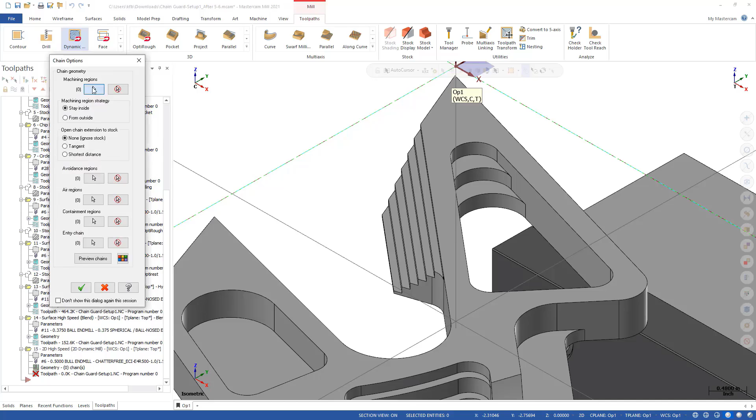I'll hit no, and go back in and do it again. But I'm going to make sure that I have loop selected now. That's a common thing that happens because Mastercam will remember the last selection method you chose.

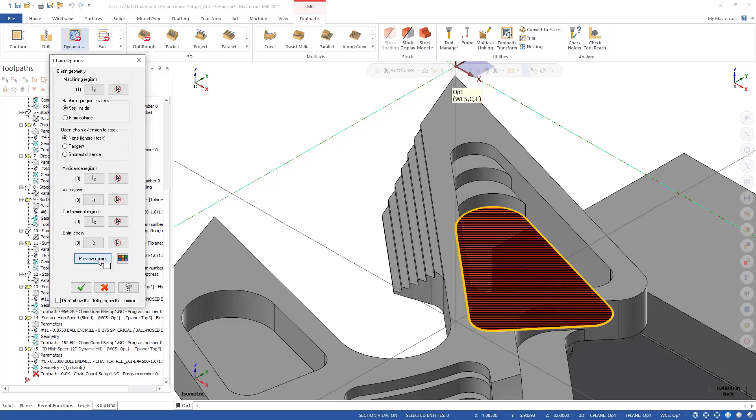So now that loop is selected, we're going to start here, and this will be the area that I'm going to machine. I'm going to stay inside, and just as a check, I hit preview chains, and of course that's exactly what I want.

For the tool, we're going to choose a 1/2-inch bullnose. We saw that earlier, it's got a little radius at the bottom. This will be dynamic mill.

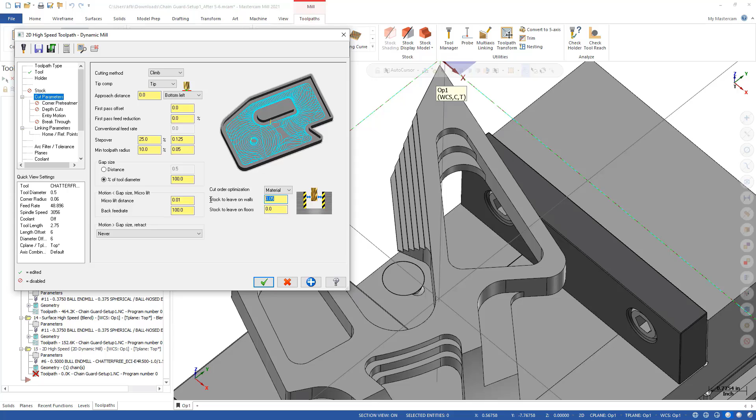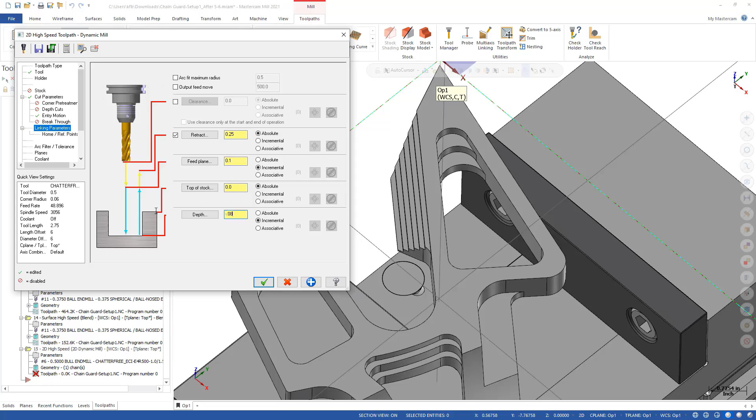I'm going to make sure I leave 0 on the walls. For my entry motion, we'll do a helix this time. For the linking parameters, we're going to go a little bit below this, because we have a radius at the corner of that tool. So let's go down minus 80 thousandths for now, and we can always adjust that if needed. Let's click OK.

And here's where our toolpath looks. So we ramp in, we walk around the outside, and let's just make sure. It does look like we're clearing it, so that's good. You can imagine if you didn't go as deep, you'd have a little bit of a cusp there that you'd have to work out.

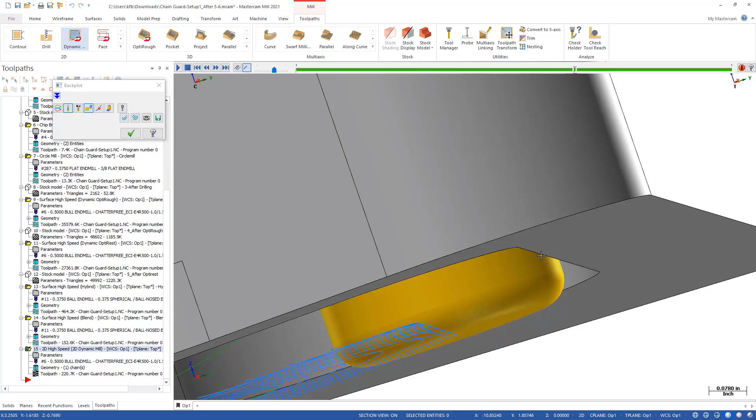Let's finish it off, and we can see how it finishes this corner. So now let's work on these two ledges. For this, I'm going to choose a contour toolpath.

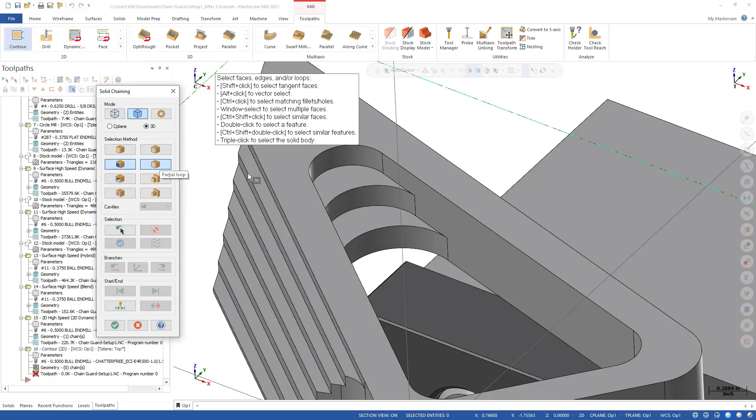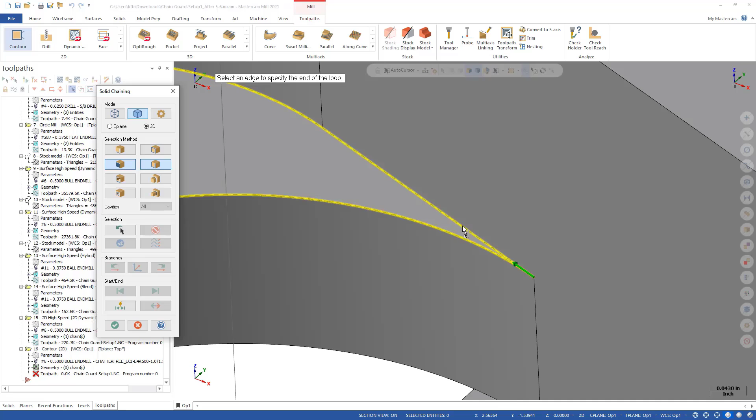Here's where partial loop is going to be useful, but selection is very important. So here I'm going to make sure that this face is selected, but closer to this edge. So it starts there. And again, it gets confusing because you're not sure if you're going up this edge or along this curve. But I'm confident I'm going up this edge because I selected closer to that edge. And it says select an edge to specify the end of the loop, and that'll be right here.

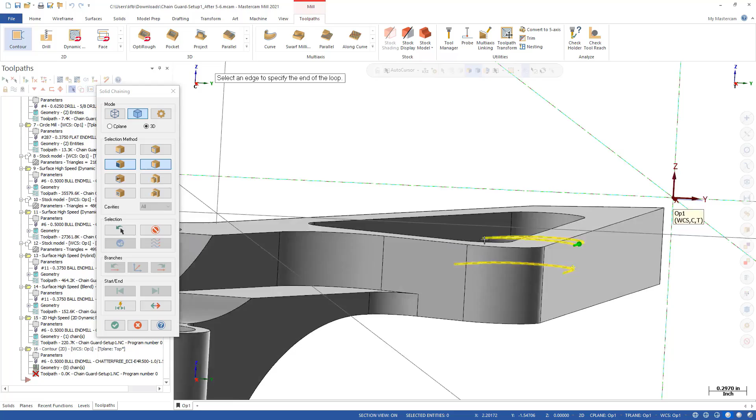So that's what I'm expecting. We'll do the same thing up top. We'll start right there, and we'll end right here.

And we're going to choose the same tool, and this will be called contour pocket. I'm not going to worry about depth cuts here. However, under the lead in, lead out, let's make sure that these are small enough, so we might have to adjust these if needed, because remember, we're starting out here and then leading in and around and then leading out.

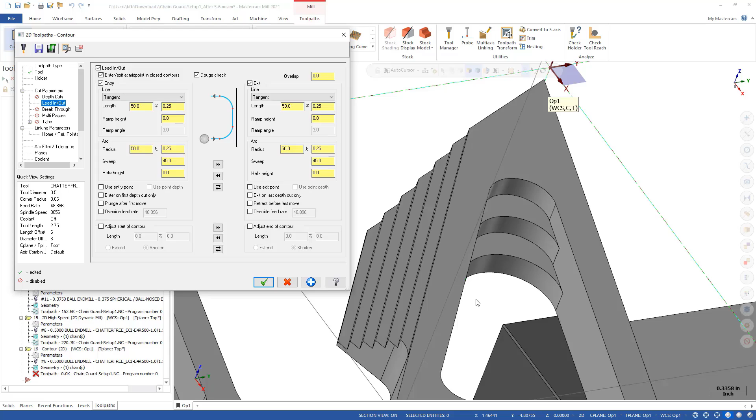And for the linking parameters, I want to make sure we go right to the level of the geometry, which will machine a nice fillet for us. So click OK.

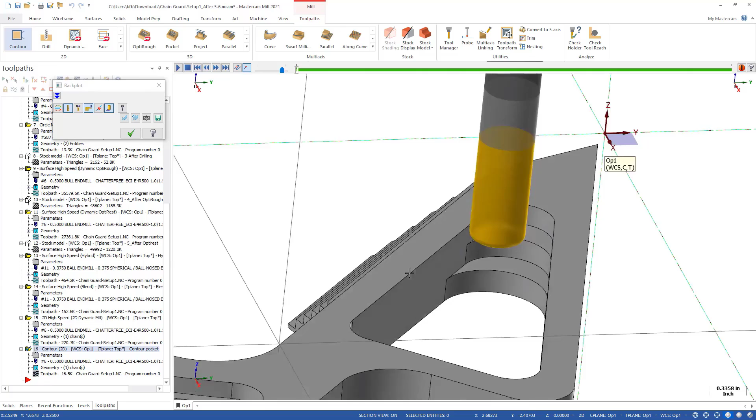Let's see how these look. And again, this would be a great example of where we turn on Quick Verify, because if the tool wasn't big enough to machine this ledge, we might have to do multi-passes. And as you can see, it does machine it, so we should be good there.

And that looks good. So we're going to finish this video by creating another stock model, incorporating those contours. We started with 5 OptiRest, and this will be 6, pocket and contour. The source operations will be that pocketing toolpath and that contouring toolpath.

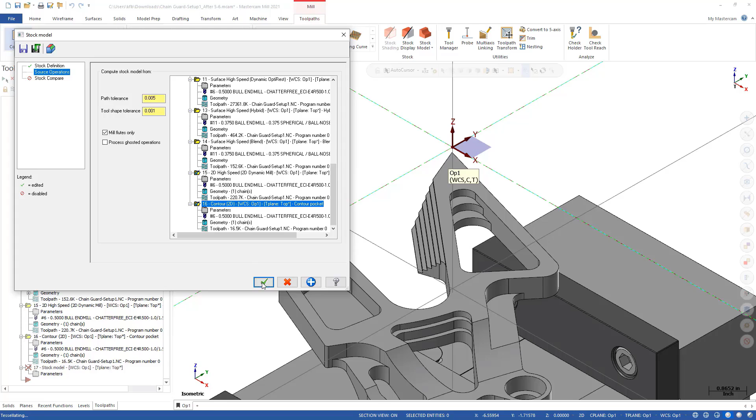And as you can see, the result looks pretty good. In here we have our fillet machined, and we have the entire pocket machined out. In our next and final lesson in this section, we're going to explore the chamfer toolpath, but we'll explore it on a separate file so we can really look into some of the benefits of using such a toolpath.